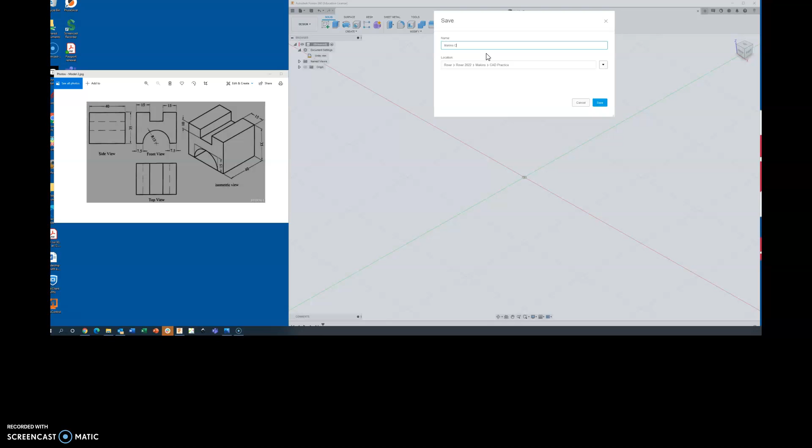Next, it's a good habit to get into: while we work in the cloud, this doesn't auto save like Google does, so let's go ahead and save this file. I'm going to save it as Macon's CAD model number 2.

The other thing I need to do is create my component to do all my work here. We will name our component, since we only have one component to this little project, I'm going to name it Macon's CAD model 2. All right, I've done that.

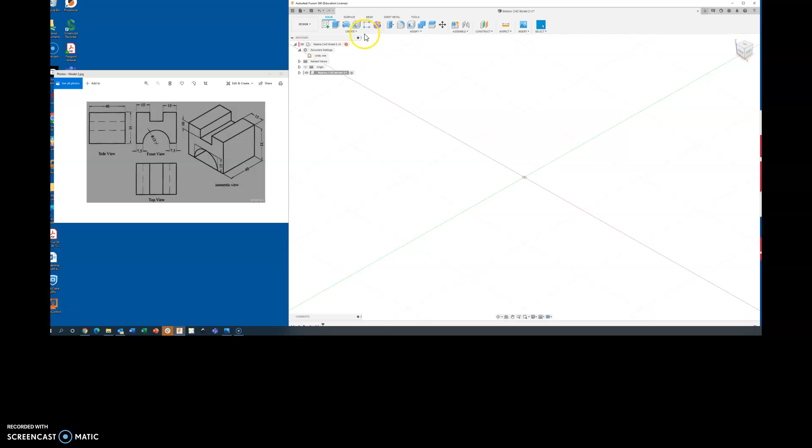Now I'm ready to create my sketch. I'm going to choose the create drop down, create sketch, choose the front plane so that I'm in the XY with the Z coming up. I'll click in my workspace, and here I am ready to go.

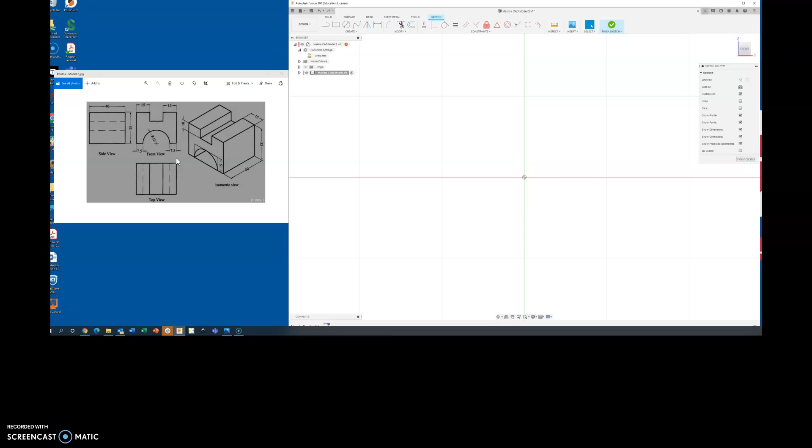The trick with these models is figuring out which surface to draw and which to extrude, and then any other actions you might need to take after you've drawn and extruded.

In looking at this, it looks to me like the best place to start is to sketch this front view with the arch and this H going up. Then we can extrude it back 40 millimeters to give it the depth.

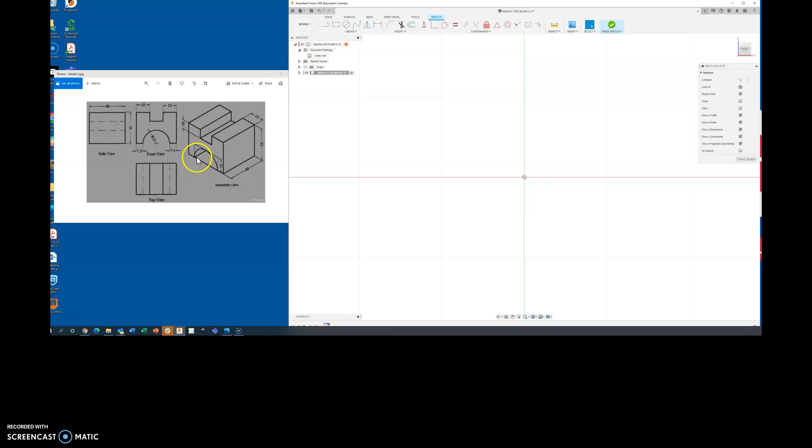From our top view, what we're seeing here is the solid lines, these rectangles here, match up with this rectangle up here, this rectangle there. These through lines line up with the arch there.

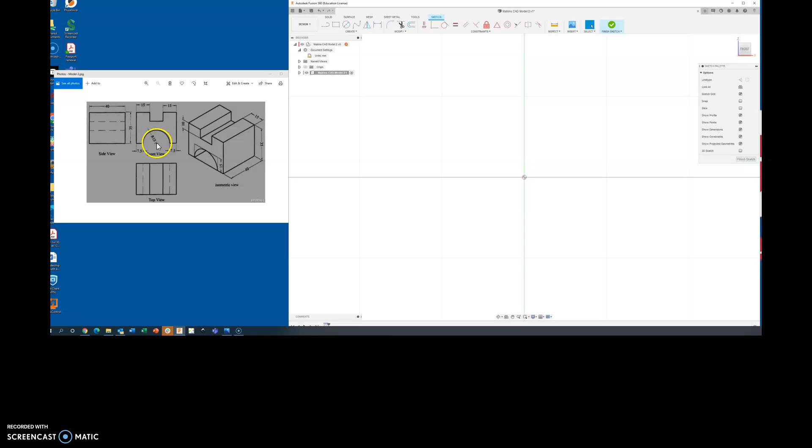I'm going to start with the arch, drawing it using the circle tool. The data says the arch has a radius of 15 millimeters. I'll come up to the circle tool, use the center diameter tool, and place it at the center origin because that makes life a little easier sometimes, typing 30 millimeters. So this top part here is going to be my arch.

So here I'm going to draw my surfaces. I'm going to come off the midpoint of my circle, 7.5 millimeters. So I've made my arch, and then from the midpoint of the arch, 7.5 millimeters, using the line tool, pull 7.5 and hit enter.

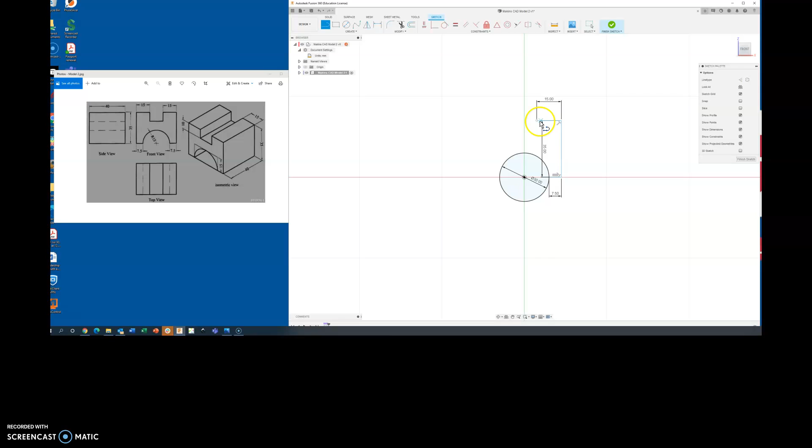Now I need to come up 35 millimeters, and across 15 millimeters. So far I'm not having to do too much thinking. I need to come down 10 millimeters.

Now I need to come across. Uh-oh, I don't have this distance anyplace. I'm not told it, it's not labeled. Well, you are told it, it's just not labeled directly, you have to do some thinking. So what we need, if we knew the distance all the way across this face, we could then subtract out this 15 millimeters and the other 15 millimeters over here.

So we have to do some detective work. Let's see. If we look at the front view, we know up here is 15, 15. Yep, that matched over here. We have its 40 back. That matches over here. We have its 35 tall. But we still are kind of missing this front. But let's see what we do have.

We do have that this little piece here is 7.5. And we know that we have 2 of those. So 7.5 plus 7.5 is 15 by my math. Now, what do we know here? This distance across, well, we know this circle or this arch has a radius of 15, but drawn as a circle, that means it has a diameter of 30 millimeters.

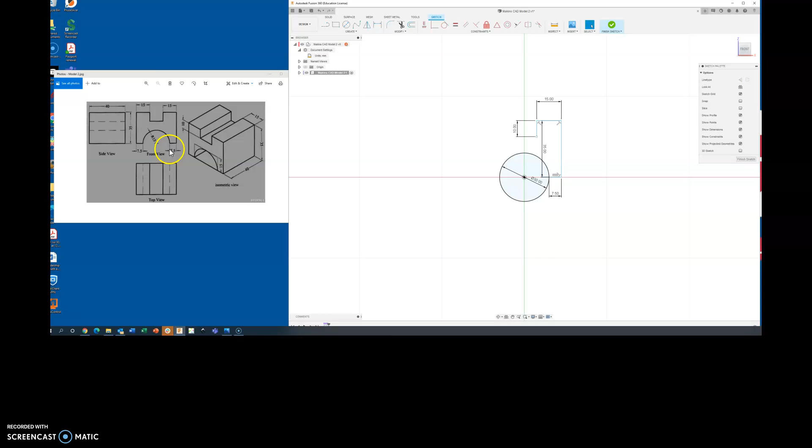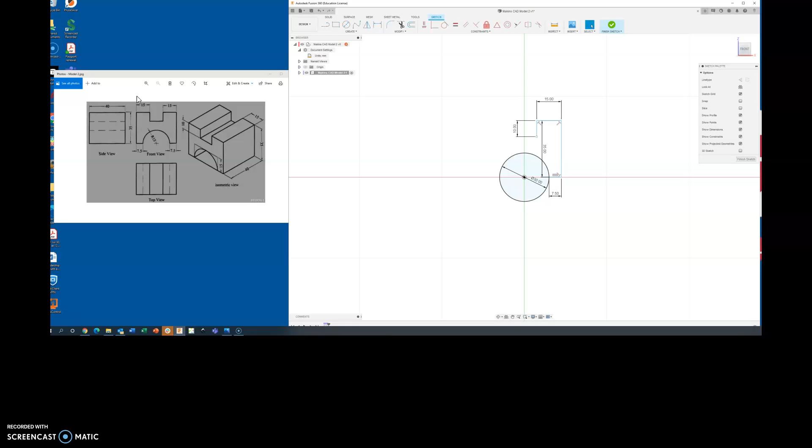So if we take the 30 millimeter diameter and add 7.5 and 7.5, or a total of 15 millimeters, we get a total of 45 millimeters, right? So, and again, let's see. We're still trying to figure out how to draw this piece. Well, if we know all the way across is 45 millimeters, and the puzzle we have is this piece in the middle. If we have 15 and 15 gets us to 30, 45 minus 30, lo and behold, I believe is 15.

So let's see if this works out. I'm going to keep on keeping on. So here I'm going to draw another line segment that's 15. I'm going to go up 10, right? I'm going to come across 15. I need to come down 35 again. And then I need to close my gap to 7.5.

And it's really important in order for this to work that we click and we're going to pull all the way to touch the edge of the circle and we're going to type 7.5. Okay. Now we should be able to come up here to our modify menu, click modify, and come... let's do this. Let's use our trim tool again.

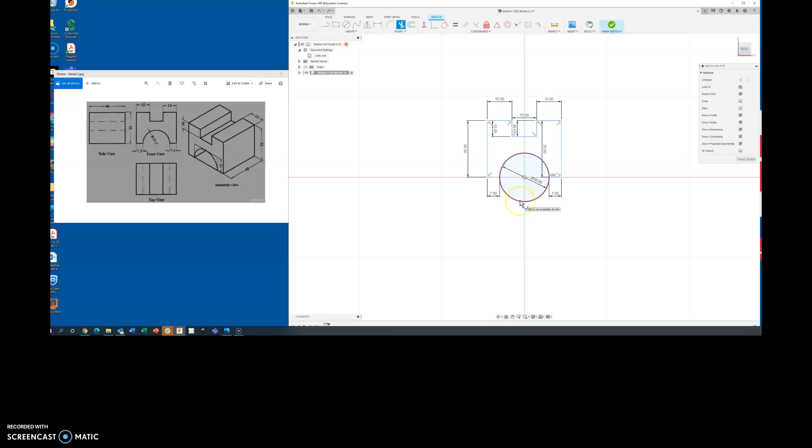Tangent. It's making it tangent to the bottom. Oh, but watch, I bet if we then go tangent circle to this, that'll fix it. It's over constrained. Okay. Let's just try doing this. Control Z. I want the circle tangent to that line. Now let's see if we can. Come on. Nope, it's still going to trim the whole circle.

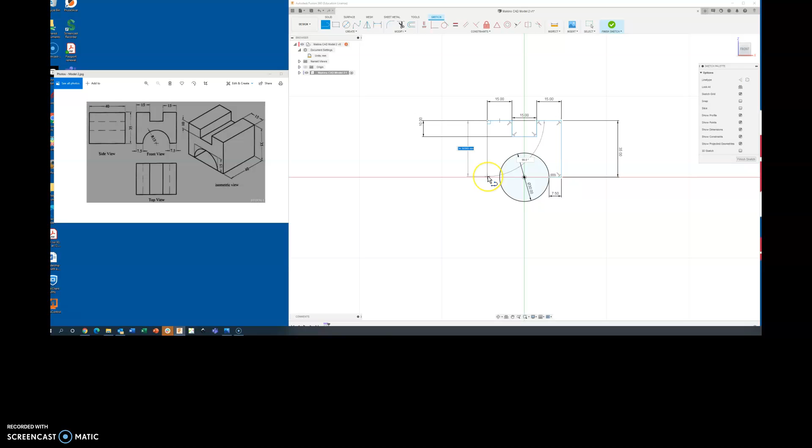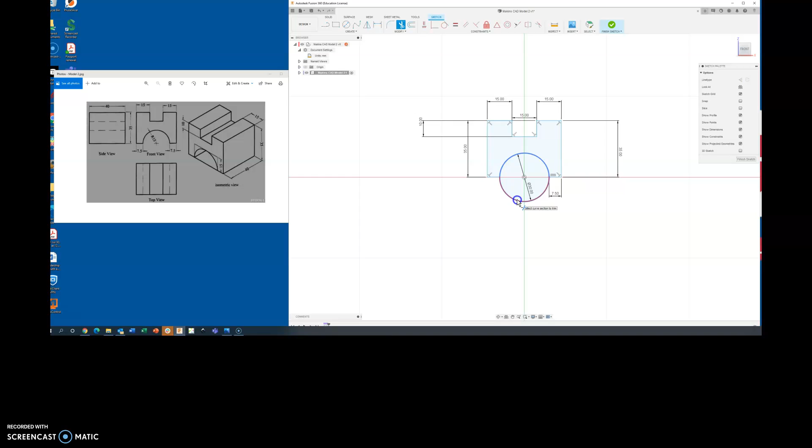Let's move some. To move the dimensions, I'm just clicking and pulling on them to kind of get them out of the way to help make it easier to see what I've got going on. Now, I'm going to come trim. There it went. Alrighty. So now I have my sketch. Need to press Finish Sketch. And there we have it.

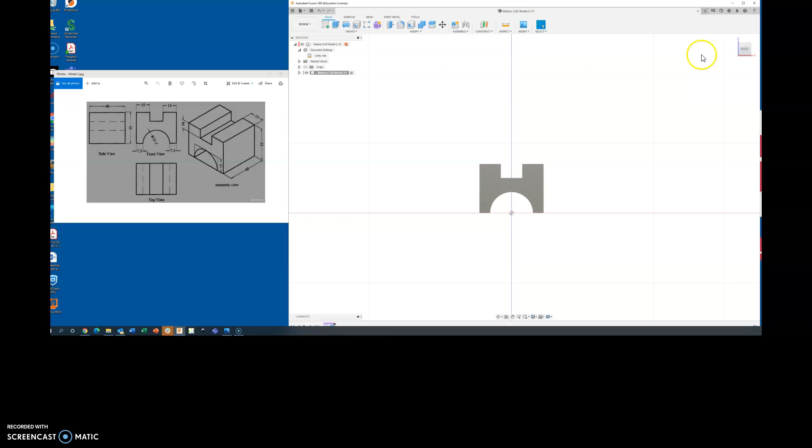All right, so now we want to extrude. And we want to extrude it 40 millimeters. And to check to make sure it extruded, we click our home view, and there it is. All right, CAD Model 2. Oh, and we got to personalize it. So press A. Let's go glossy red. There we go. So you make it whatever color you would like.

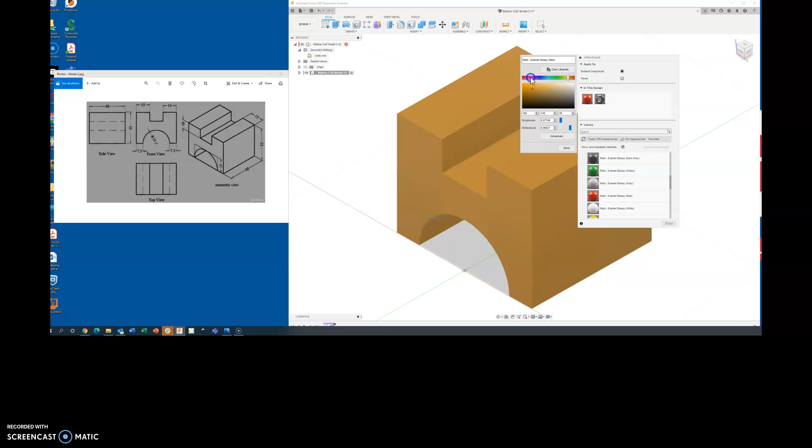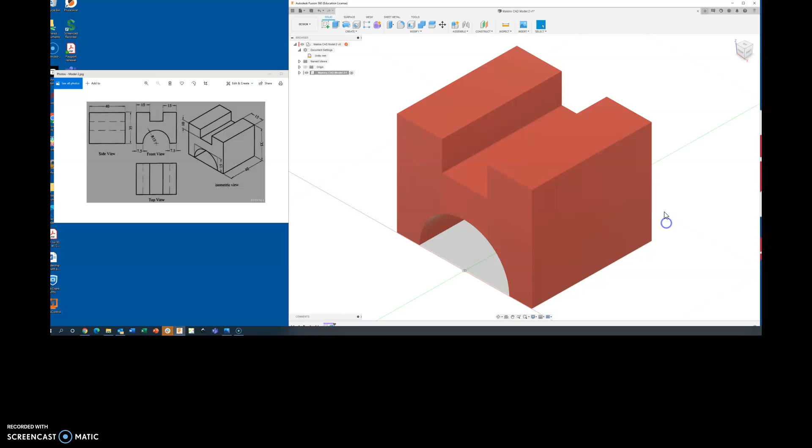And oh, don't forget, if you want, press A again. If you double click on it up here, you can have some fun and make it, I don't know, like there's orange. I'm just trying to get pink. There we go, pink. Okay, so you can have some fun doing whatever color you'd like. I think I'm gonna stick with just my glossy red. Okay, but you personalize it for you. All right, that's CAD model number 2.